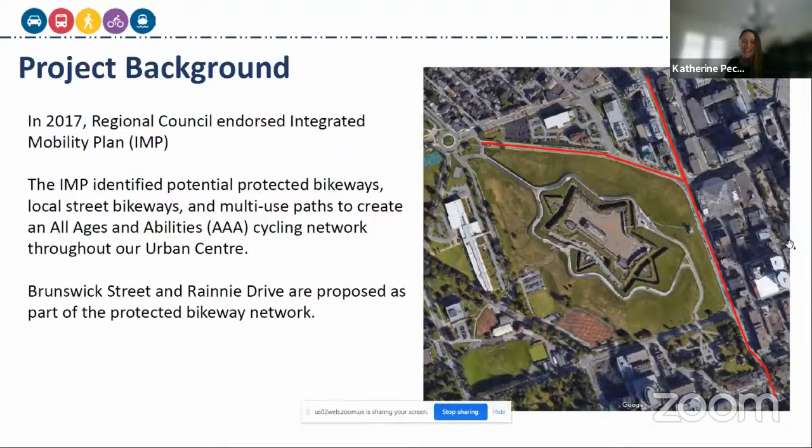So the policy direction is guided by the Integrated Mobility Plan, Action 121, identifying strategic corridors, existing road corridors that are key to regional traffic flow, transit, goods movement, and active transportation, and developing plans that will guide their development over time. Again, Brunswick Street is identified as an all ages and abilities bicycle route, and the AT plan also identifies Brunswick Street as a candidate bicycle route.

Within functional planning, we do have a higher vision of the corridor's functionality as a street and as a place, looking at it both as a way of moving people and vehicles through the street, as well as a place. Being at the base of Citadel Hill, it has very high place value, as the Citadel is the historic center of our city. It's also sort of the western gateway to the downtown. It connects the north end into downtown, as well as bordering the entertainment district. So it's a very important part of our city.

It's also a missing link between the Common and Dalhousie, as well as connecting from the north end of the Commons to downtown. So we want to make those connections.

So the design objectives for the project: we're looking at ways to enhance the pedestrian realm, make it more comfortable for pedestrians and those walking and rolling, and develop a AAA bicycle facility. Currently there is an on-street bikeway, but it is not protected, while continuing to accommodate vehicular traffic, including trucks and buses. A portion of the street between Sackville Street and Cogswell Street is a truck route, and there are a couple of bus routes that run between Duke Street and Cogswell Street, although there are no stops along Brunswick.

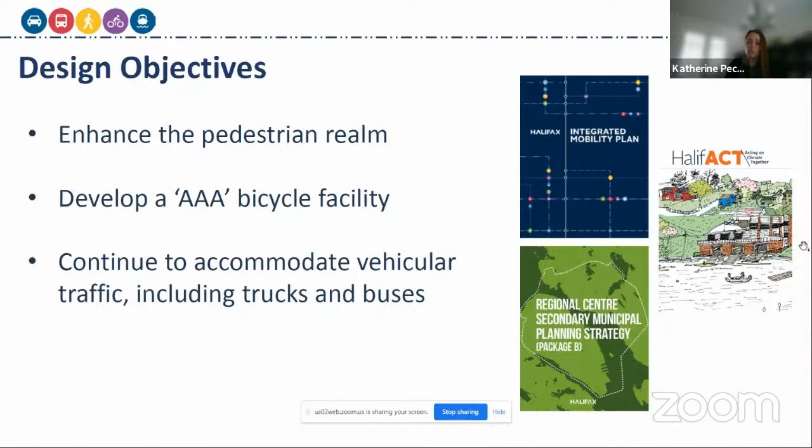In terms of the off-street elements that we're looking at, the rationale that we've developed is looking to expand the pedestrian space and resolve some pinch points that currently exist along the corridor. We want to ensure adequate separation between pedestrians and cyclists, as well as between cyclists and motor vehicles, providing adequate buffer space between cyclists and vehicular traffic, as well as pedestrians, according to both NACTO and TAC recommendations, to the best ability that space allows, as well as creating opportunities for seating and other amenities, making it more of a place and creating a more comfortable environment.

So we had some guiding principles that we were looking at. Again, encouraging cycling by enhancing the user experience and safety. The objectives were improved infrastructure as well as the AAA facility.

And then looking at doing that by extending and connecting the existing Brunswick Street bikeway, creating connections to the Commons, Cogswell Street and Spring Garden Road, as well as the Sexton Campus multi-use path that exists.

The creation of the raised or protected bike lane, separating cyclists from other user groups. The improvement of pedestrian experience through durable and smooth walking surfaces, universal accessibility best practices. So fixing depressed curbs, making sure we've got tactile warning indicators, adjusting grade changes where possible, and making sure things are safe for all user groups, trying to narrow the street to reduce vehicle speeds and providing adequate buffers. We wanted to improve the public realm and the amenities.

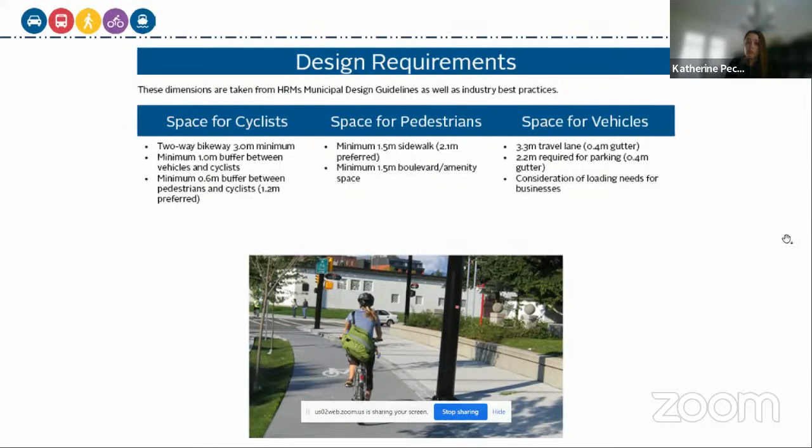We have completed public engagement. There was, due to COVID restrictions at the time, everything was done online. The survey was posted online on August 24th and was open until September 30th, as well as a video posted on YouTube, which is still up. We got 1,100 survey responses and I believe just over 300 views on the YouTube video, which we were quite happy with. That's far more than we would get at a typical public meeting.

We presented 3 concepts to the public: a concept that focused all this sort of extra space - space that wasn't already predetermined as being pedestrian, cyclist, or motor vehicle - putting all that extra space either to pedestrians, an option that put it all to green space, and then an option that sort of balanced the two.

So the preferred designs by segment. Along the corridor, there are 4 segments: Cogswell to Duke Street to Sackville Street, and then Sackville to just south of the Cambridge Suites Hotel, and then Cambridge Suites to Spring Garden Road. I'll go through each segment separately, just so you can see what each cross section looks like.

And they're separated because of the width of the right-of-way. So the Cogswell Street to Duke Street, moving from the north end south, is our widest segment at 23.3 meters for the right-of-way, so it is quite generous. We have what we've looked at here.

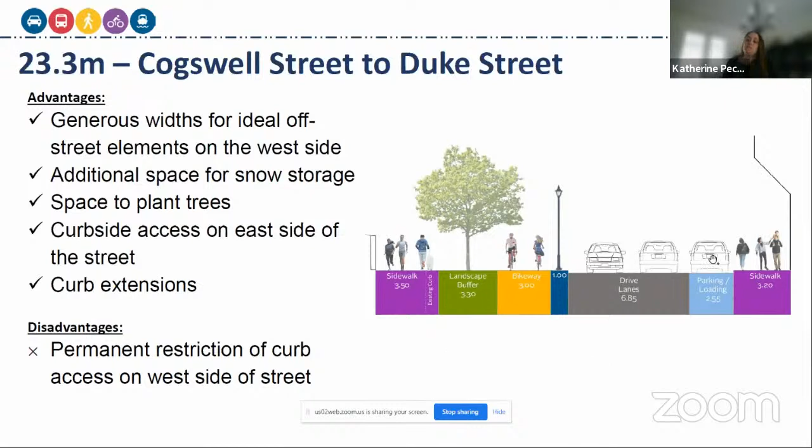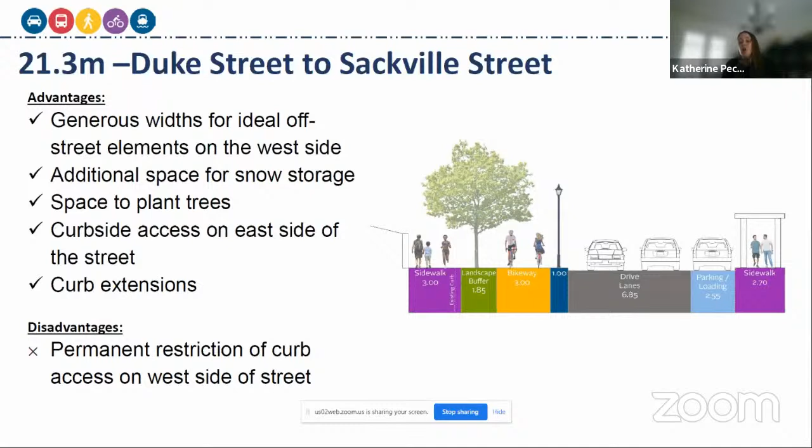So our next segment, going from Duke Street to Sackville Street, is about 2 meters narrower at 21.3 meters. Again, the only real difference here is on the left side of the diagram. You'll see the sidewalk is 3 meters wide, and the landscape buffer is 1.85. The sidewalk is still a little bit wider than what exists currently, but not as generous as in the previous segment.

And moving south, we get to Sackville Street to the edge, the corner of the Grafton Park apartment building, where the apartment building and Cambridge Suites Hotel meet. This is our narrowest segment at 17.3 meters.

For this segment, parking is removed from both sides of the street, so there will be no more on-street parking or loading, with the exception of the existing accessible parking space that exists between Sackville Street, Cambridge Suites and Grafton Park, near the little office building there. So that accessible parking space will remain, but all the other parking is removed.

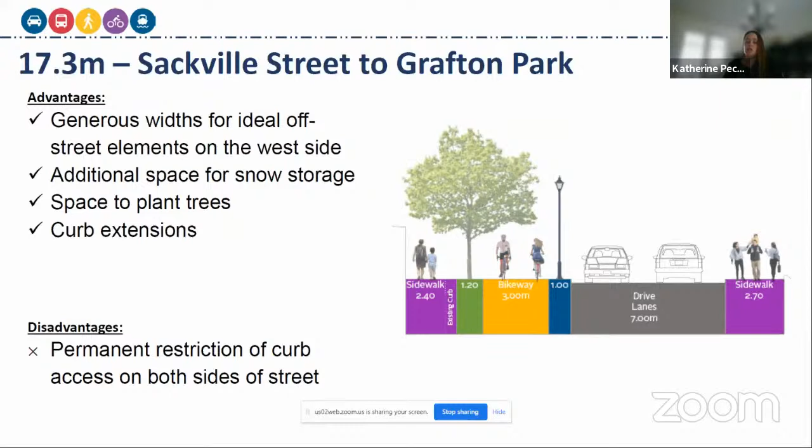We are making the sidewalk a bit wider. Again, you can see where the existing curb is, and we've managed to bump it out to be 2.4 meters. And we have a 1.2 meter landscape buffer here as well. This is the portion of the street that borders the Department of National Defense property and that very large retaining wall on that south part of Sackville Street.

And finally, we have the southernmost portion, from Grafton Park to Doyle Street. There, again, what we've done is what's considered the pedestrian focused design. So you will see we have a very wide sidewalk, and part of the reason for that is to maintain the ability for the businesses on the corner to put out patios.

In this case, we don't have the space for the tree buffer, so what we're proposing is a half height curb grade separation. Instead of a full 6-inch curb, we would do a 3-inch curb so that for folks using a guide dog or a cane, there is a detectable edge that can be followed to help with that separation. You would also have lighter color concrete adjacent to the black asphalt to help with the contrast, to make it more obvious that this is where pedestrians belong versus where cyclists belong.

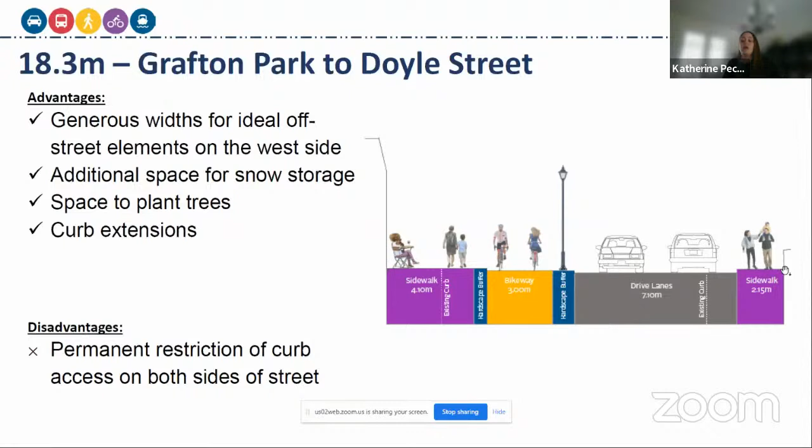And again, all parking is removed from this stretch. And then this is where the project joins into the existing piece that was built between Doyle Street and Spring Garden Road. So there is that very wide sod boulevard that exists, built out in cooperation with the developer, to make sure we have space in the right of way to build this facility and connect over to Sexton Campus.

The other piece of the project is Rainnie Drive. So we looked at several options for Rainnie Drive. Rainnie Drive was actually not part of the public consultation.

We asked general questions about it, but this diagram hasn't been shown to the public to date, just because there were a lot of internal conversations happening at the time about what we could and couldn't do.

So what we're looking at for Rainnie Drive is raising the bicycle facility. Currently it's protected by bollards, but we want to raise it and make it a more formal part of the AAA network.

We have a 2-meter sidewalk adjacent to Citadel Hill with a 1.8 meter landscape buffer, and a 3-meter bikeway with a 1-meter buffer between the drive lane and the bikeway. We've removed parking from the south side, maintaining all parking on the north side of the hill, and we're keeping the existing sidewalk width on the north side as well.

While we're removing some parking, we're also able to extend the length of parking availability, so we should be able to regain some spaces on the north side from the south side. It's not a complete loss of parking, and in conversations with parking services, they weren't concerned with us removing that.

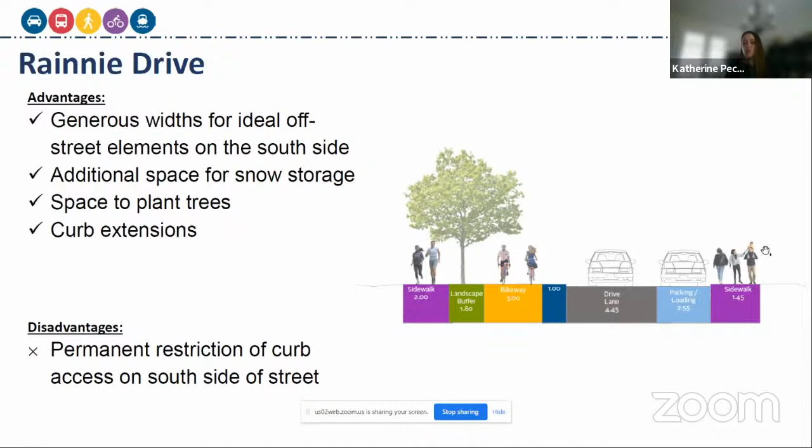I failed to update this based on a few things that have happened. We're looking to move to TSC next month, in June, and then Regional Council will follow likely in early July. Once the functional plan has been approved by Council, the design moves to Anne Sherwood's group, Project Planning and Design, to do detailed design. Whether that's done in-house or through a consultant, we don't know yet, but the intention is for this to be constructed during the 24-25 construction year.

So that concludes my presentation. I'll stop sharing my screen for now. I can bring it back up if we need to, but it just makes it easier for me to see people. Happy to answer any questions.

Thank you very much, Katherine, that was very useful, and I'm sure there will be some questions. I do have a speaking list here, and I'm going to just call on people in order, starting with Councillor Kent. No, Hugh, I don't have any questions today. Thanks. Okay, thank you.

Annika Ropel? Yeah, hi, I just had a quick question about where this path is going to intersect with Spring Garden. Is there any plan for moving that crosswalk in terms of connecting over to the library and the campus?

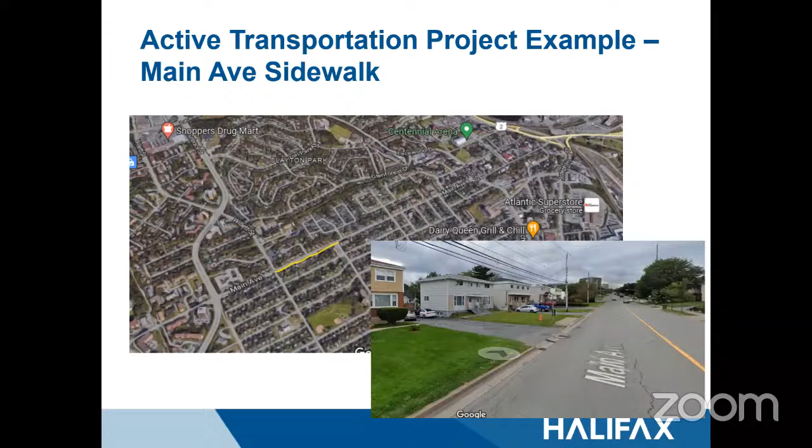Google, I love it when Google Street View gives me the perfect image for presentations. You can see where the bus has transit service, and an example of the deluxe bus pad, which is almost in the middle of the ditch. We have a resident there on the narrow gravel shoulder. In addition to the new sidewalk, we have to replace the ditch with a piping system, and we're going to do some streetscaping through there and put in curb and connections to the bus stops on the other side.

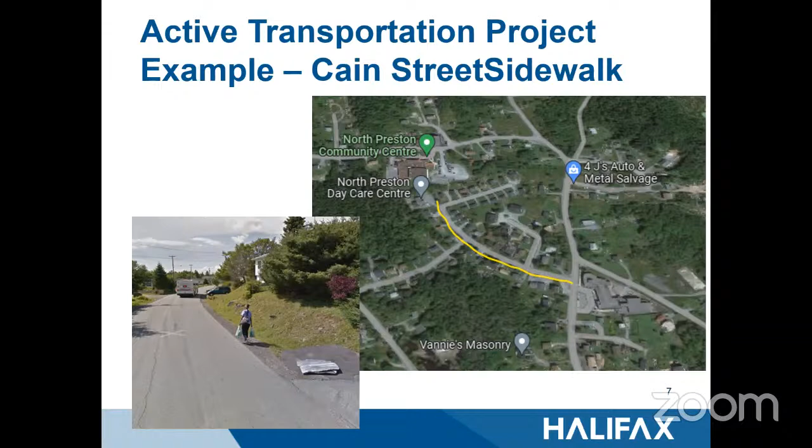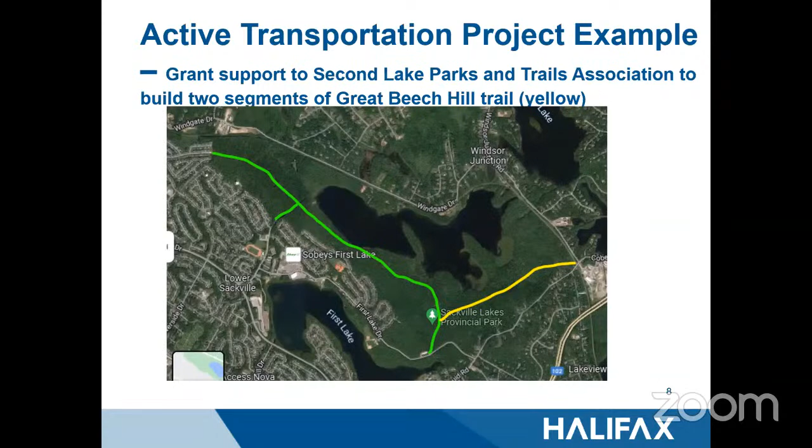Final project. I was just finishing this up at about 4 o'clock today, and I thought, I've got to get this project in while Hugh is here, because he's been a big advocate for this.

Right now there's a substandard pathway that was built. I believe it was built by a developer as part of an agreement, and Hugh will know the full history on this, but I don't think they did the best job.

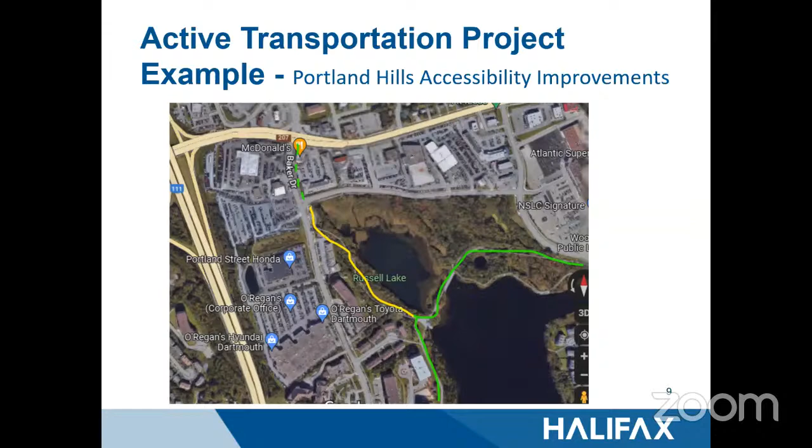We've got a segment of the Dartmouth Harbourfront Greenway that, if the property acquisition gods shine favorably on us, we'll be able to build this year. A little bit more work on Hollis Street, and Almon Street was approved.

Dublin Street's not... actually it's the Liverpool Street local street bikeway, but we're doing this because Halifax Water is working on Dublin Street this year. We're going to build the local street bikeway intersection.

We've got the McDonald Bridge Bikeway Halifax side in the budget, and I think we've put partial construction, but really that's going to be tendering this year, hoping to give the construction sector a good chunk of time to get ready to build that next year.

The final project is some work at the intersection of Joseph Howe, exit 0 from the 102, making a better connection from the Chain of Lakes Trail into the Peninsula network and to the multi-use pathway on Bayers Road. There's a little bit of money there for capital upgrades to existing facilities.

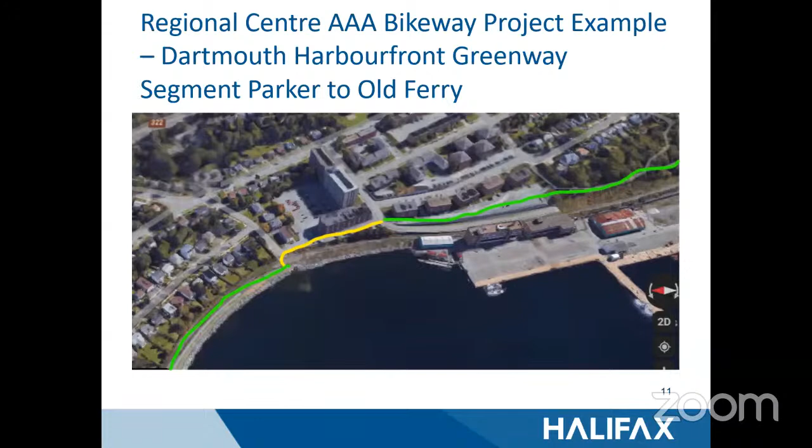That will get us right in, making the connection to the bus station, the train station, and the grocery store there. Like all these projects, it opens up questions about where you go from there on Barrington Street, or from there on the port's property down by the cruise ship terminal and Pier 21. But those are the next steps. For now, we're looking to get at least these sections extended next year.

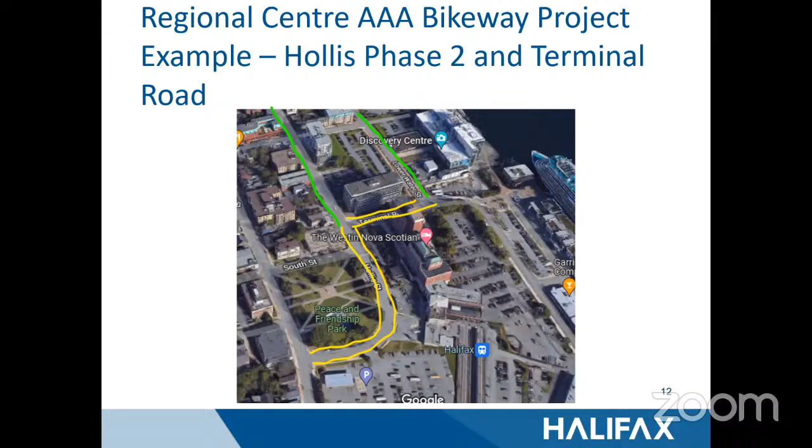I'm not sure if I have another one there, Katie, but next slide. No, I don't. Anyway, that's it.

Happy to take questions either at this meeting, or if anybody ever has questions about these budget numbers and where to find more information on the project, please feel free to reach out to me directly.

Thank you. Thank you, David. That was very informative, and I'm sure everyone was looking for their pet projects there. There'll probably be a number of questions. I've got a different speaking list this time—we'll go through in order, starting with Miles McCormick.

Okay, sorry, I was muted. Thank you very much for the presentation, and Douglas, thanks for the link. Thank you. Okay, thank you, Miles.

Andrew Taylor. Nothing from me, Chair. Okay, Andrew, thank you.

Milena Casanavicius: thank you, Chair. David, great presentation. I'll reach out for some extra information, but I want to say how excited I am to hear budgets for sidewalks. And I had a question—you mentioned something about Dublin Street and Halifax Water doing work.